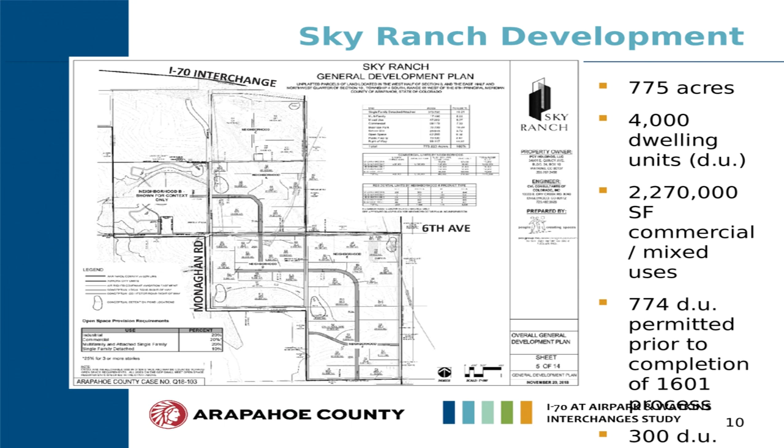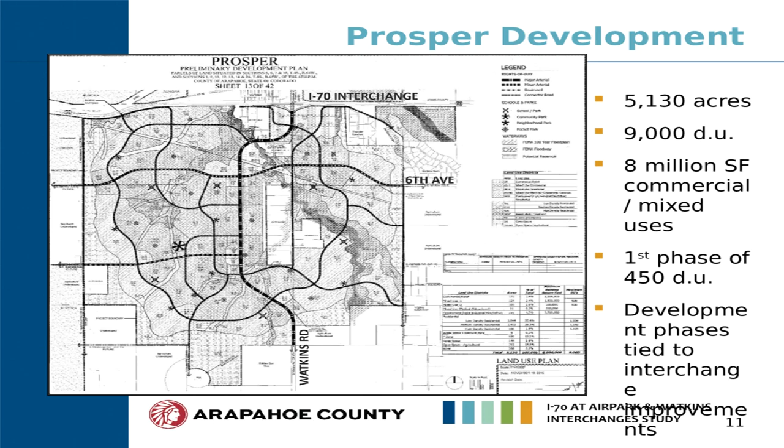This is the plan for the Prosper development, which is much larger at 5,130 acres. The Prosper plan is for 9,000 dwelling units and 8 million square feet of commercial and mixed-use development. The Prosper development hasn't broken ground yet, but they plan to construct 450 homes in their first phase. They are planning their phases and roadway improvements in order to maintain adequate traffic operations.

This study considered the regional context in planning the need for improvements into the 2040 horizon and beyond. This includes the existing roadway network, as well as the interchanges and roadway connections that are planned to be constructed in the future by 2040.

The City of Aurora and Adams County plan to extend Monaghan Road from I-70 north to 64th Avenue to create a continuous north-south connection in conjunction with adjacent development. Future development along 6th Avenue in the City of Aurora and Arapahoe County would also result in the eventual connection of 6th Avenue east from Powhatan Road to Watkins Road.

I'm sure most of you are familiar with the existing interchanges, but I'll quickly review what exists today. The I-70 Airpark interchange is a typical rural diamond interchange. It has 2 through lanes on Colorado 36, which travels over I-70. There are single lane ramps to and from I-70 and the 2-lane frontage road, which is Colfax Avenue. The bridge over I-70 was built in 1997 and is in good condition from a road and bridge condition standpoint.

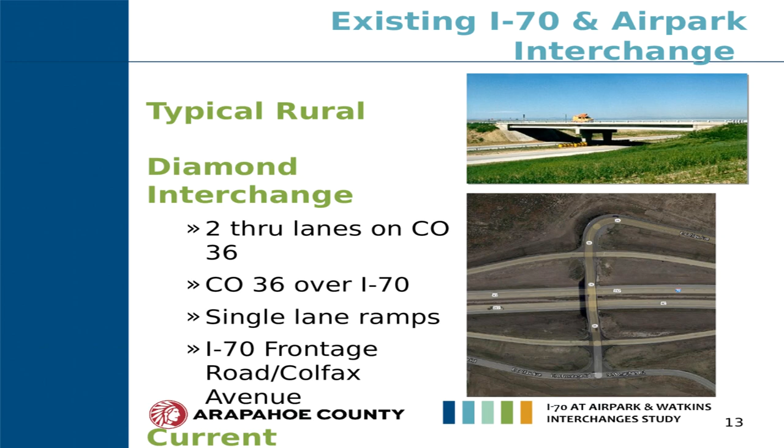So where do you live or work? I'll give you a few different options here. Press 1 for Fox Ridge Farm, press 2 for Sky Ranch, press 3 for Watkins, press 4 for Watkins Farm, press 5 for other area north of I-70, or 6 for another area south of I-70.

I'll go through those one more time for you. 1 for Fox Ridge Farm, 2 for Sky Ranch, 3 for Watkins, 4 for Watkins Farm, 5 for other area north of I-70, and 6 for other area south of I-70. Please record your vote now on the phone, and we'll share the results with you in a little bit.

Next, you'll hear from Joe Hart, our project manager with David Evans & Associates, about the study process and the recommendations. Thanks, Leah, and thanks for everyone who's joining us tonight.

First, I'd like to outline the process we used for this study. We began by analyzing existing conditions and forecast traffic volumes and traffic patterns in this large, developing area. We were then able to estimate when improvements to the Airpark and Watkins interchanges would be required based on anticipated development trends.

We established improvement alternatives for what would ultimately be needed in 2040 at each interchange, and as part of this evaluation, we estimated the useful life of phased improvements considering traffic projections and estimated costs. As a final step, we will document the study recommendations in a final report available on the project webpage this fall.

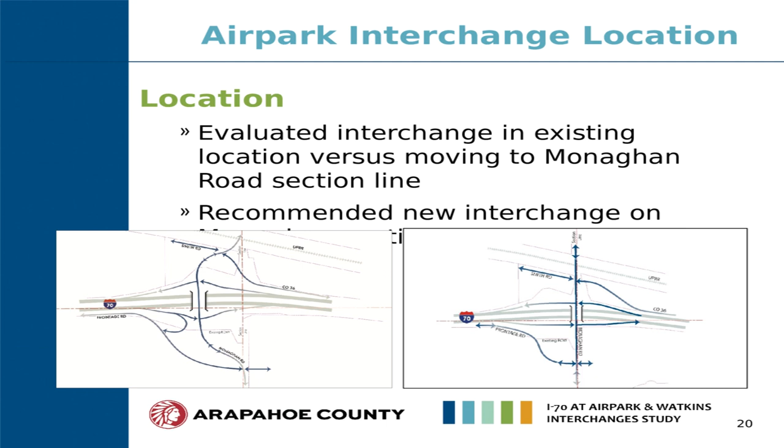This alignment is consistent with city and county plans and provides preferable driver expectancy, safety, and operations, and can be implemented while maintaining traffic operations at the current interchange location.

Then we looked at many interchange configurations at both Airpark and Watkins interchanges. For the sake of time tonight, I'll focus on describing only the alternatives that are recommended to move forward into future environmental study and further design.

More work after this study still needs to be done to review the recommendations, and in the case at Airpark, choose between two remaining alternatives. So we have those two alternative configurations that are recommended for further study.

One is a continuous flow interchange, using the acronym CFI, and this configuration would serve the anticipated heavy northbound to westbound AM peak hour movement by allowing this traffic movement to shift to the west side of Monaghan Road as it approaches I-70 and then make a left turn to the westbound on-ramp.

This slide zooms in a bit so you can see more detail, and PDFs of these recommended improvements will be posted to the project webpage by this Friday so that you can take your time reviewing and zoom in even more to see the details.

Other ramp improvements would function like a standard diamond interchange. In general, the travel lanes through the interchange would include two northbound lanes with the crossover displaced left turn lanes for northbound to westbound, and then two southbound lanes with one additional separated lane for the southbound to eastbound left turn.

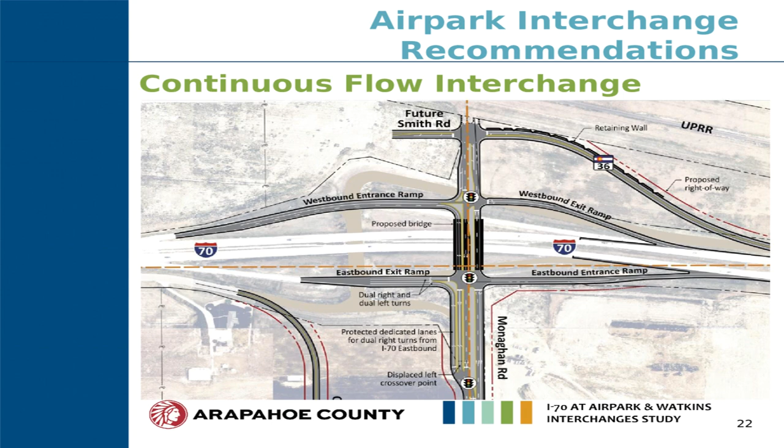The other alternative at Airpark is a partial cloverleaf with slip ramp. Westbound exit ramp traffic would slip off I-70 east of the interchange, with traffic bound for Monaghan Road crossing over Colorado 36 and merging with westbound Colorado 36 traffic.

This configuration would also serve the heavy directional peak hour flows for northbound to westbound left turns with a cloverleaf loop ramp. Again, travel lanes through the interchange would include 4 northbound lanes with 2 lanes for the loop ramp and 2 northbound on Monaghan.

And there would be 3 southbound lanes with 1 lane for southbound to eastbound left turns and 2 lanes heading south down Monaghan Road. Again, pedestrian and bicycle facilities would be included with a separated multi-use path on the west side of the bridge over I-70 to avoid conflicts with the free-flowing vehicular traffic heading to the cloverleaf loop. A multi-use path would also be included on the west side of Monaghan, north and south of I-70.

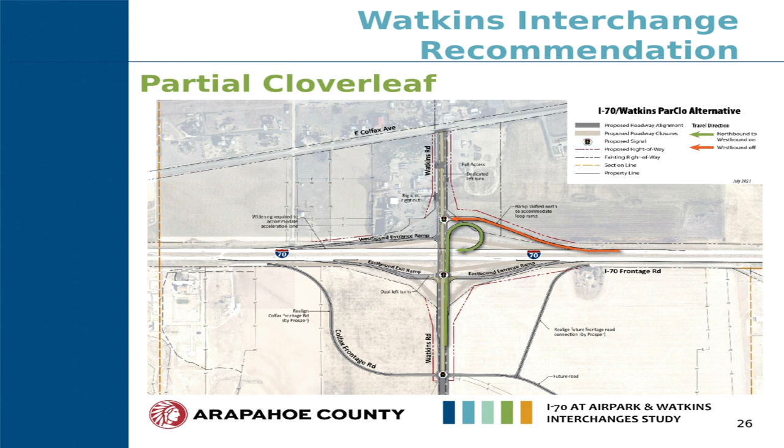and a multi-use path north and south of the interchange. At Airpark, the continuous flow interchange construction is anticipated to cost $45.5 million, and the partial cloverleaf with slip ramp a bit more would be at $49 million. The Watkins partial cloverleaf interchange improvement is estimated at $52.7 million.

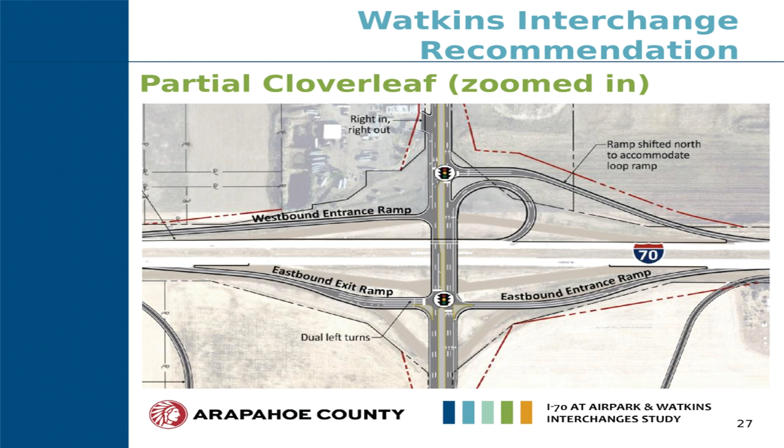These are substantial costs for improvements that are not currently on the Denver Regional Council of Governments fiscally constrained plans, which means no funding is allocated for these interchange improvements that prioritize all of the transportation projects in the Denver metro area. Now that we have completed this study and know how much money is needed, Arapahoe County, in conjunction with development, metropolitan districts, and Adams County and City of Aurora, will be looking for ways to fund the interchange improvement construction.

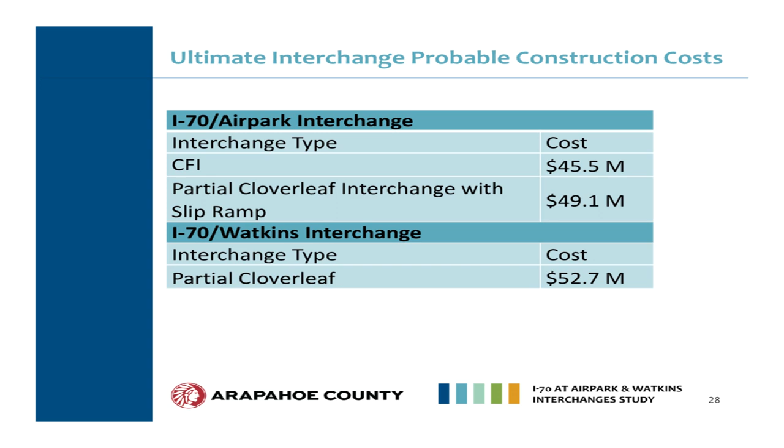Since improvements may be needed as soon as 2025 based on development trends, we needed to consider implementing these ultimate improvements in affordable phases. We considered the elements that are most needed and would provide the biggest bang for the buck. At Airpark, an improved diamond interchange would be compatible with either of the 2 alternatives moving forward.

This phased approach would allow the interchange to operate as a traditional diamond with signalized ramp intersections at Monaghan Road. Phase 1 of the ultimate improvements are shown highlighted in gray on the screen. These first phase improvements would involve relocating the frontage road, building half the ultimate bridge, and providing north and south left turn lanes and signalizing intersections.

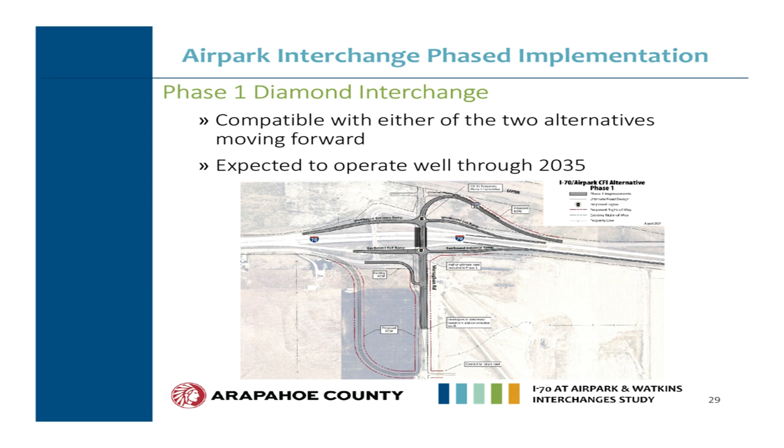The second phase, at a later date, would widen the bridge to the ultimate width and incorporate the necessary lanes for either the continuous flow interchange or the partial cloverleaf, whichever is the final recommendation. The bridge widening and cloverleaf ramp construction would not likely be necessary until Monaghan Road was extended north of the interchange over the Union Pacific Railroad tracks.

At Watkins Road, very similarly, an initial diamond interchange configuration would also work well until the cloverleaf in the northeast quadrant is needed. This first phase as a traditional diamond would have a signalized ramp intersection with Watkins Road at both ramps. Phase 1 would involve relocating the frontage road to the south and building half of the ultimate bridge to provide north-south left turn lanes and signalizing those ramp intersections.

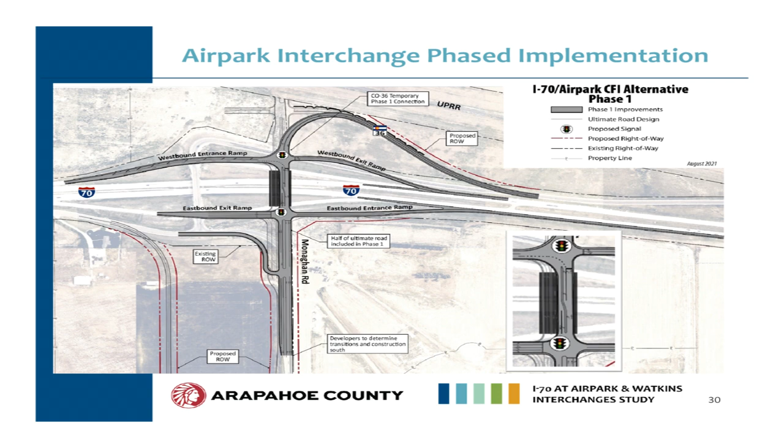This phase is expected to operate well through 2040. The existing westbound ramp would then need to be reconstructed in a subsequent phase when the loop ramp was constructed. At both interchanges, phase 1 improvements are anticipated to cost approximately $30 million. Remember, the ultimate interchanges were each estimated to cost in the $45 to $52 million range, so this is a bit more than half of the ultimate improvement cost.

Funding has been one of the biggest challenges the county has faced in developing transportation system needs and addressing those to meet community improvements. Historically, transportation improvement projects have been underfunded, which has delayed many needed projects.

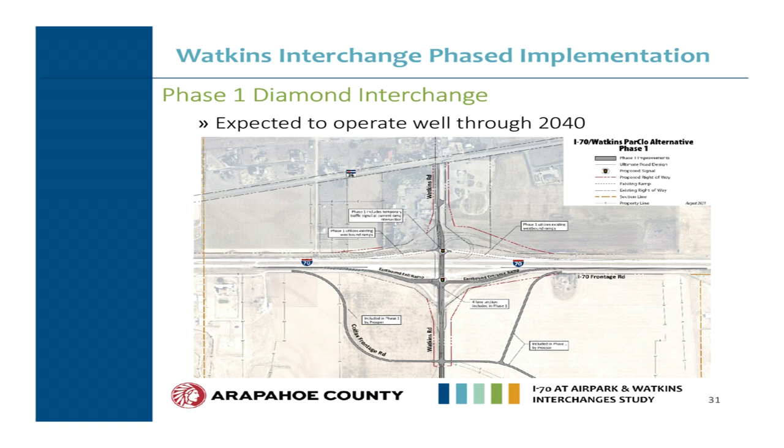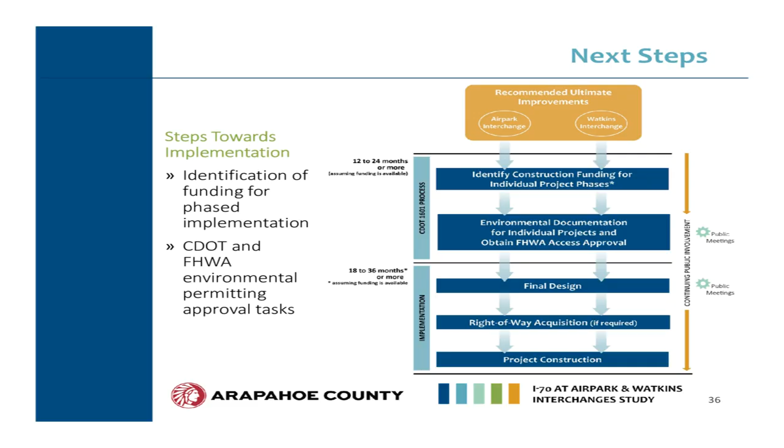All right, thank you, Leah. Arapahoe County is very happy to have a clear picture of the improvements we need at I-70/Airpark and I-70/Watkins Interchange. This project is unique from that perspective compared to other interchanges we have done in the past. Typically when we have to do these type of studies, we already have issues—operational, safety, or capacity. But with this study, we're looking into the future and identifying solutions before we have those problems.

The similarity that we have with this study compared to other studies is actually funding. As Joe indicated, these upgrades are very expensive, so we're looking at various options and trying to think outside the box of what we can do to fund these improvements. We've looked at whether there's a regional transportation authority, whether there are impact fees, what that might look like. We continue to coordinate with our partners—CDOT, Adams County, City of Aurora, the area developers, area property owners—to see how we might be able to fund these improvements.

As we do that, we'll come up with recommendations to spread that impact across all stakeholders. I will note that Prosper and Sky Ranch, the nearest developers to these interchanges, are committing to paying their fair share associated with these improvements, as they have a great impact on the study area. Those are commitments we're willing to make here at Arapahoe County.

I will note also that we need to have this funding in place so that we can move forward with some type of environmental clearance document. Without having that in place, we will not be able to clear these projects environmentally through the federal process. And since they access I-70, we will need to be able to do that.